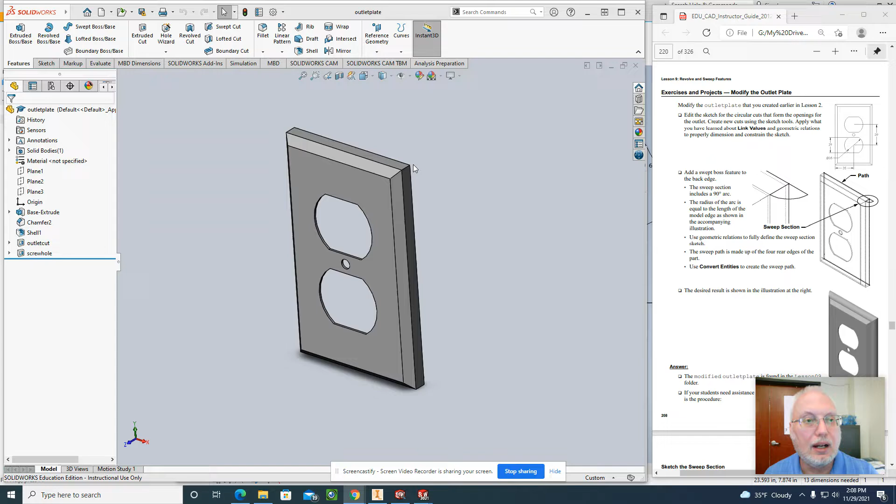Hey everybody, Mr. Seward here, and today I'm going to show you how to do lesson 6 of SolidWorks tutorials, this switch plate modification or outlet plate modification. That's what is in these instructions over here. So I'm going to scroll down here a little bit. This is in the teacher's manual.

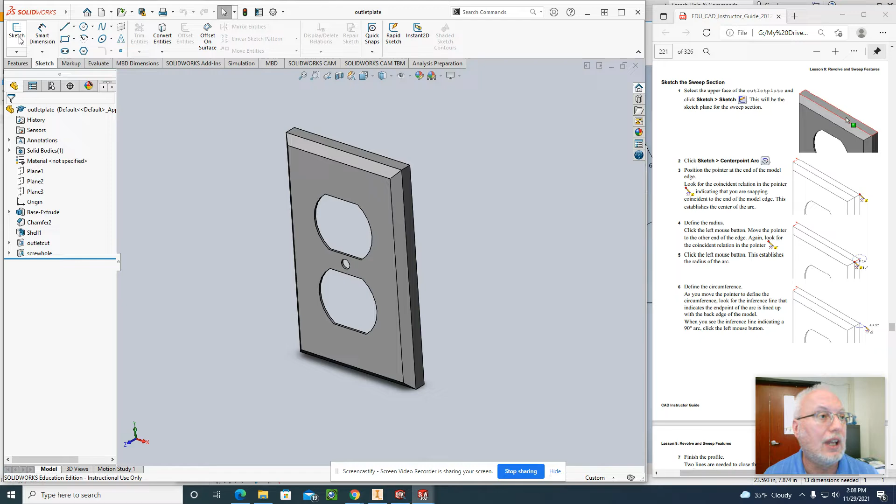So it tells us that we first have to create the sweep section. Now you do that by starting a new sketch. So I'm going to go to sketch and hit the sketch. And then I'm going to click on this top surface. And when I do that, I can do a couple things here. I can either work on this in this orientation, or I can look at it isometrically. Let's do that. I kind of like that myself.

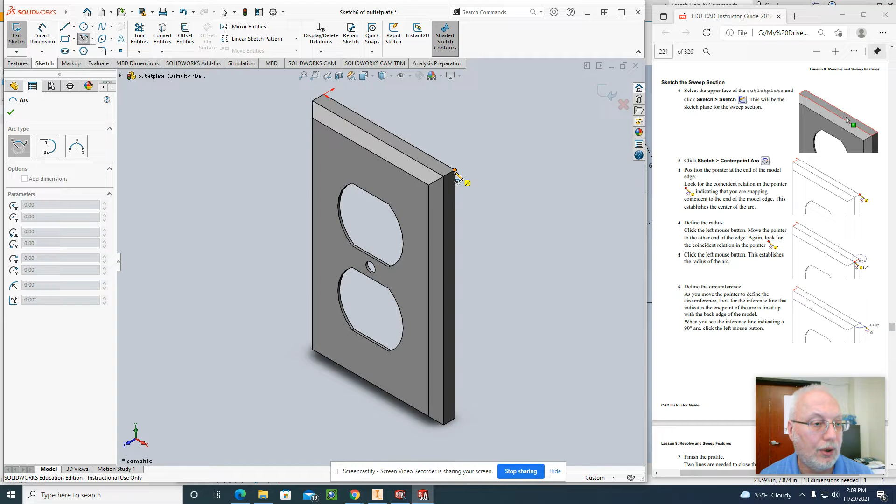And I'll put this modification out here on this edge. So the first thing I want to do is I want to sketch a center point arc. The center point is going to go right on this back corner here. And then I'll zoom in on it a little bit here. The other point is going to go right here at the edge of this part, okay? And then I can pull this out until I get to where that little line is, the little dash one, and I'm going to click there.

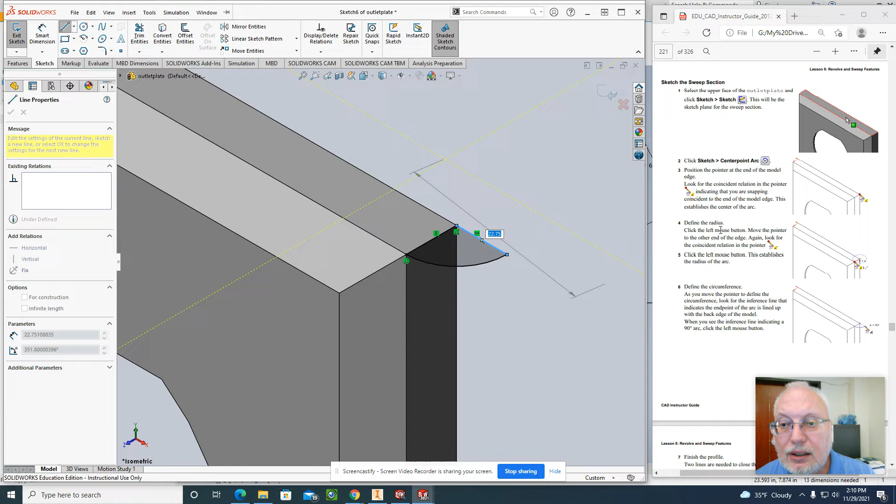Now I have to draw two more lines. So I'm going to start the line tool. I'm going to go from the end point of this arc to the end point of the part, and then I'm going to go over to the opposite end point of the arc, and I'll green check mark. So I just defined the radius. Okay, now we're going to finish this profile. Whoops, what's going on? I hit an extra thing here. Okay, so I'm going to finish this sketch. Let's see, finish sketch, exit sketch, here it is.

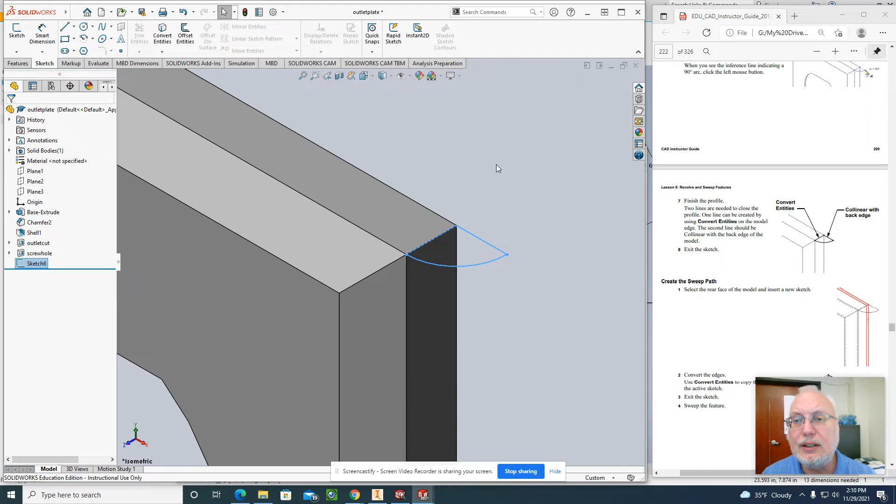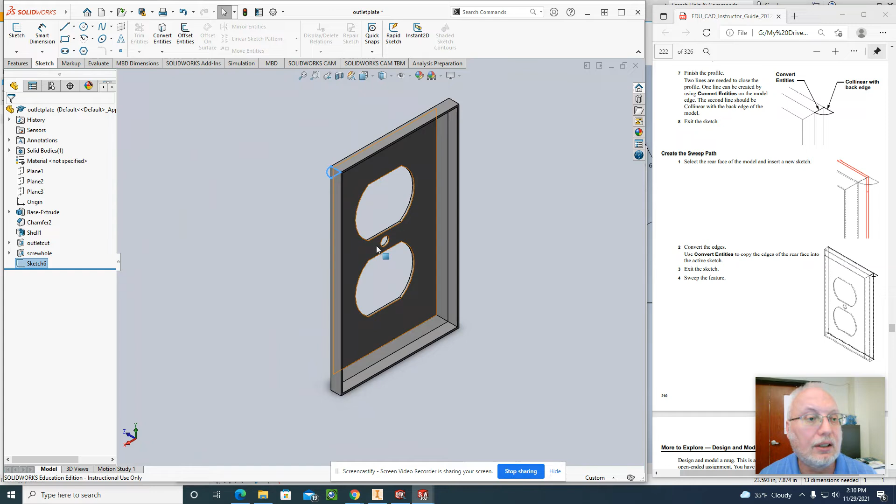And now I need to create a second sketch for the path to be followed by my part. So I'm going to create the sweep path. I'm going to select the rear face of the model and insert a new sketch. So go to my little cube thing here, and I'll flip this around so that I can see the back surface here. And I'm going to start another sketch. Oh, I guess I jumped ahead there on flipping this thing around. This is what I want to be able to see right here. Okay, so I'm going to put this sketch on this surface right here, that little edge.

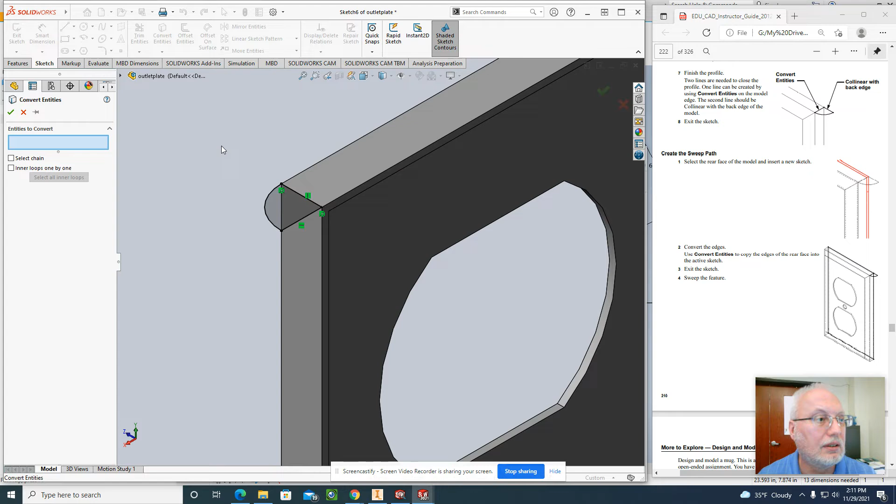Okay, and once I have done that, then I'm going to use convert entities, which is right here. Oh wow, it's giving me a message here. Let's see. Did I get a second sketch in there? No, I didn't. All right, so I'm going to exit the sketch that I have. I'm going to restart my sketch. I'm going to pick on this surface. Okay, so now I'm convinced I've got that going.

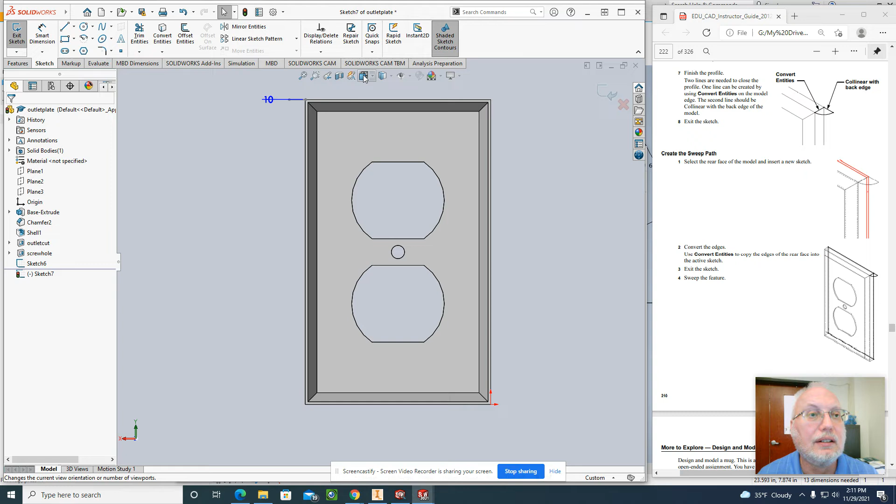And I'll go back to my isometric view, and then I'll spin this guy around one time, so I'm looking at it from the back, because that's what I want to see. And now I'm going to do convert entities, and I'll come in and I'm going to pick on that surface again, right there. And then I'm going to green check mark that. So that should have converted that edge into a path. Okay.

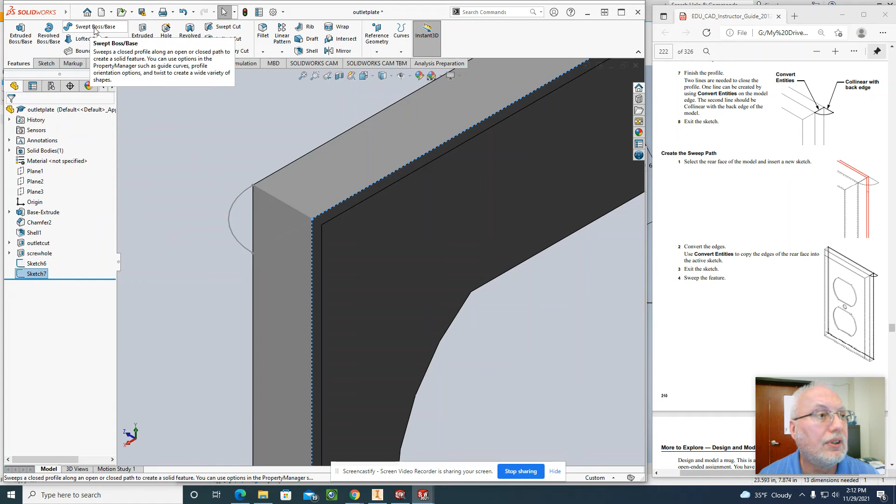Now I'll exit my sketch because I've got my two sketches, and I will go to features, sweep, and sketch 7 is already shown as my entity to sweep. I'm going to click on sketch 6. I think I got this backwards. Yeah, I sure do. Well, that's why we have the undo command, right?

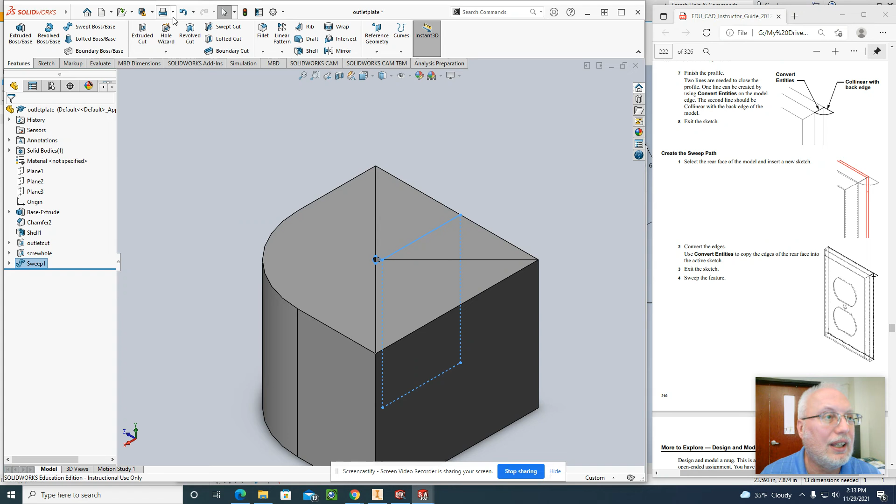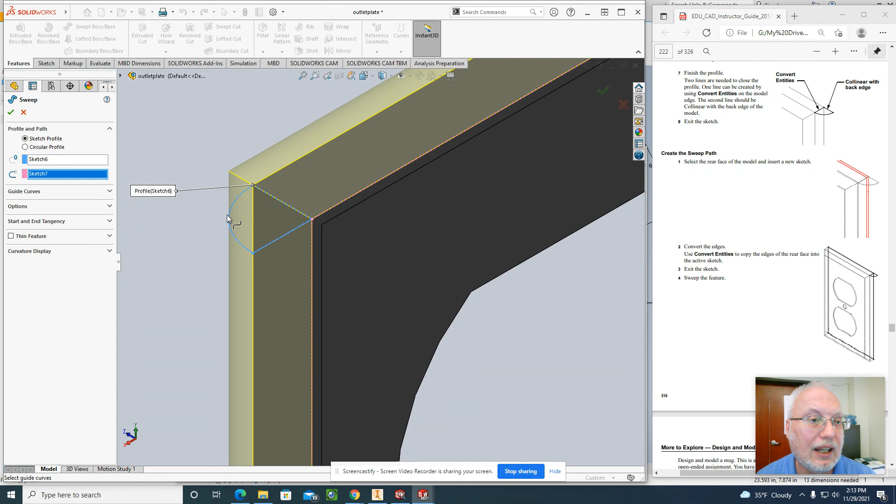So sweep, and for the entity to sweep, I'll click on the arced part there, and then the next one is it wants to know the sketched entity, so I'll select that and green check mark. And if I take a look at this isometrically from the front, there it is. So I goofed it up a little bit, but in general, that's what you have to do.